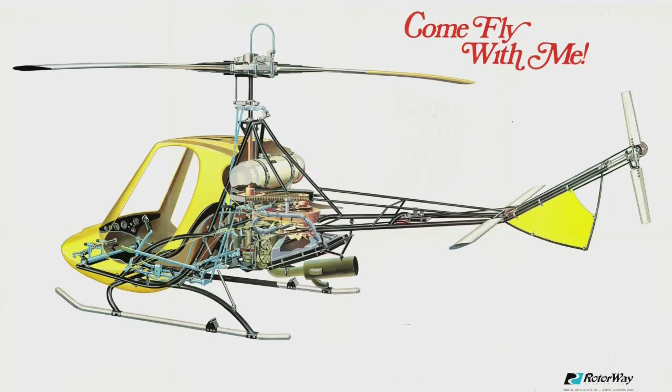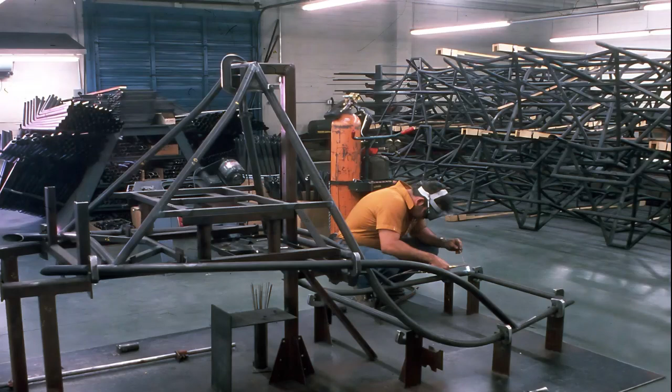After the metal is bent into the proper shape, it is then taken over to the jig area. In this fixture, the airframe is jig fitted and tack welded, so when you receive your airframe, it'll already be properly aligned, and all you'll need to do is finish the welds. In the background, you can see some of the airframes that are already finished and are ready for shipment.

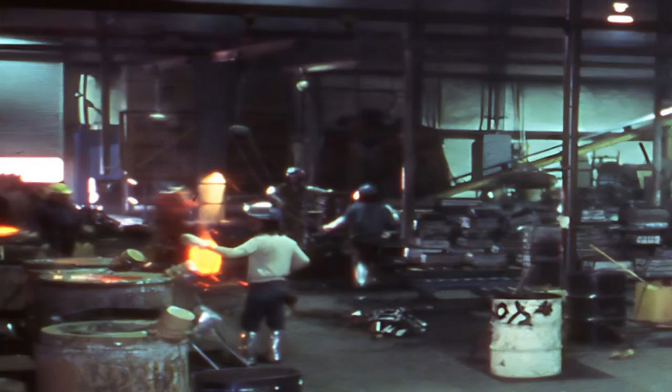This is an interior view of our modern foundry. Several years ago, we decided to go to castings in many areas of the Scorpion to make it more professional and to keep the cost down. But we had a problem finding a foundry that could cast to the precision that we desired. Therefore, we decided to build our own foundry. In the left center, you'll see the fires of the furnaces. In this foundry, we pour non-ferrous materials, primarily aluminum alloys and brass.

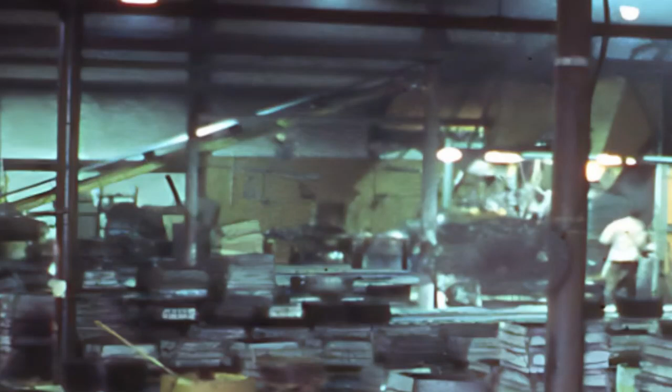In the right foreground, and extending back through the center of the picture, you'll see a grill work in the floor. This houses the underground conveyor belt which handles the sand. In most foundries, the sand is handled from station to station with shovels and wheelbarrows. Here, the only shovels and wheelbarrows you'll see are used for cleanup at the end of the day. The sand starts in the large yellow hopper at the rear of the building.

There it is filtered and cleaned, and then it is transferred to the orange hopper to the right, which is a muller machine. Here the sand is reconstituted with chemicals and moistures for the right consistency, and then it goes up the conveyor belt to the overhead distribution system on your right. From here it is dropped down through automatic hoppers down to the molding stations where the molders make the molds. The molders then put the molds on the conveyor tracks, they move over to the left, and the metal is poured into the molds. After the metal is cooled, the molds are broken open, the parts removed, and the sand goes back down through the grill work to the underground conveyor belt and back to the yellow hopper for reprocessing.

It is this foundry, with all the capability it gives us, that makes the Scorpion so feasible. It's also what made possible the development of our own power plant. The Scorpion is the only general aviation aircraft with its own power plant.

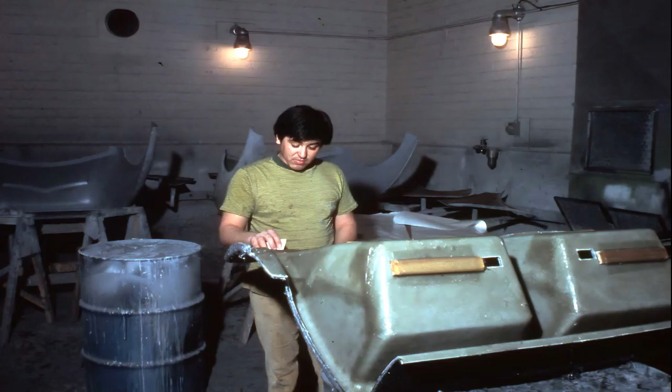This is a view of our fiberglass department. Most fiberglass today is made by a chopper gun. The chopper gun is a much faster and more economical means. However, it is not as strong and is very heavy. Because in an aircraft we're interested in lightweight and strength, we use the hand layup process. In this area, the cabins, seats, instrument panel, oil bath, and all the other fiberglass components in the Scorpion are made, right here in-house.

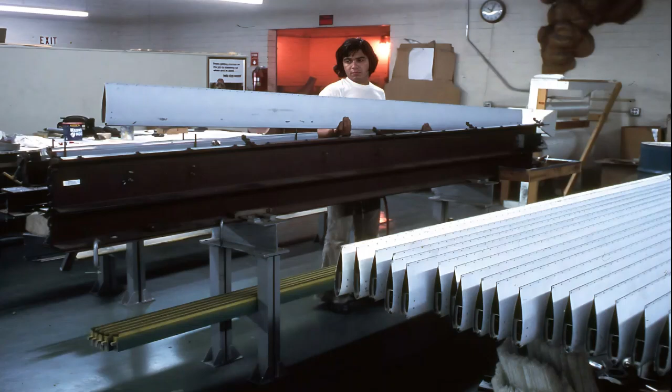This is a view of our blade area. The blade is the heart of any helicopter. The design and construction of a helicopter blade is extremely critical. Not only must they be aerodynamically equal, but they must have the same physical properties such as weight, rigidity, and resonant frequency. The blades for the larger commercial helicopters start at around $6,000 to $9,000 a set, yet in the Scorpion we can make them for a fraction of that price. Our technology in this area is another one of the things that makes the Scorpion so practical for the average person.

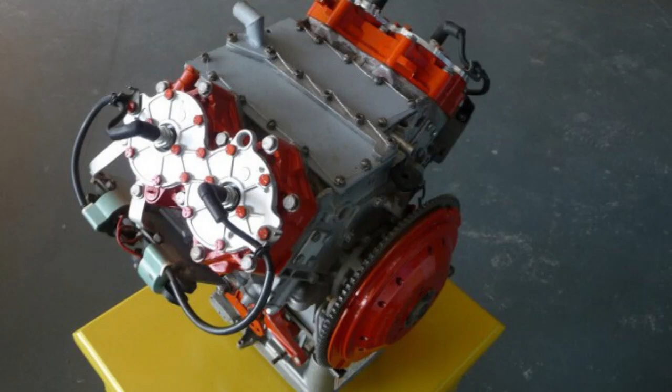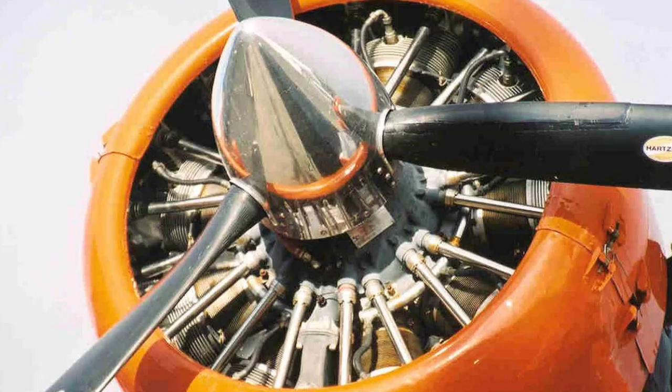As I mentioned earlier, Rotorway makes its own engine. For those of you who have followed the Scorpion for a number of years, you'll recall that we used to use the Evinrude outboard motor. When Rotorway started to develop the Scorpion helicopter, the selection of an engine was given prime consideration. Many engines were looked into. One of the first and most obvious engines to look into would be the standard aircraft engine. But you see, aircraft engines are designed to run horizontally with a prop out front. It doesn't run well vertically. We wanted a vertically running engine so that we wouldn't need a gearbox to transfer the direction from horizontal to vertical, because the gearbox or transmission in a helicopter would be as expensive as the Scorpion itself.

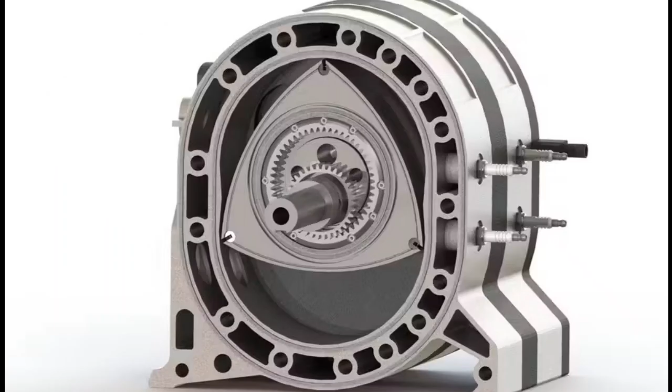Now you may say, I see larger helicopters that have the engines running vertically. Yes, they do, but you see, during the war when the military wanted helicopters, they paid for the development of vertical running engines. This was a very costly process, but the engines they developed were large engines for large helicopters. They're too large for the Scorpion, and all of the other existing aircraft engines in the smaller category are not suitable for running vertically. We investigated many engines: the Continental, Lycoming, Franklin, Chevrolet, Porsche, Volkswagen, many foreign engines such as the Wankel, the NSU, the Mazda, you name it. We've probably tried it. And yet we found that the only engine that made the Scorpion possible was the Evinrude outboard motor.

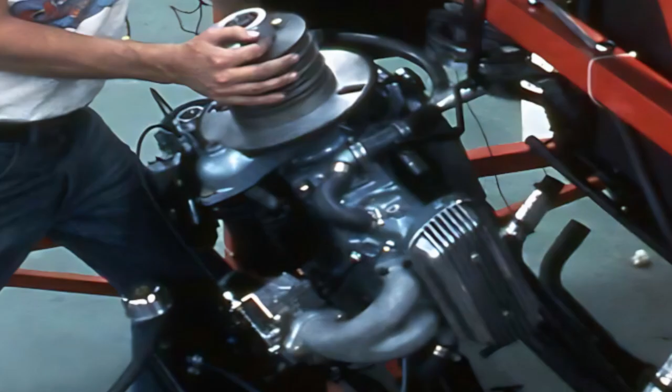The Evinrude was a fine engine, but it was a two-stroke engine which required the mixing of the oil and the gas, and this, as you're aware, causes spark plug fouling. The Evinrude was also a V4 configuration, and a V configuration engine has a rocking couple moment of vibration. Also, two-stroke engines have to run at a very high RPM, and they don't develop very much torque. We wanted a four-stroke engine for the Scorpion, but none was available that was suitable for our application, and thus we decided to develop our own engine. We have designed, developed, and are now producing the RW133, a horizontally opposed, four-cylinder, four-stroke aircraft type engine, all right here at Rotorway for the Scorpion.

This engine is water-cooled. You see, in a helicopter, in a hover, it requires almost maximum horsepower, and at that time there's no ram air. In your car or in an airplane, when you're developing maximum horsepower at maximum speed, you have ram air. To have an air-cooled engine would require a tremendous blower. If we were to use an air-cooled engine, it would require about 36 horsepower of blower to cool it in a hover. But because of the greater coefficient of cooling of water, we can cool this engine with about 6 horsepower. Another advantage of water-cooled engines is that they run quieter because they have a water jacket around the cylinders, and you don't have all those air fins which radiate sound. A water-cooled engine runs cooler than an air-cooled engine, and therefore you don't have as much exhaust emissions.

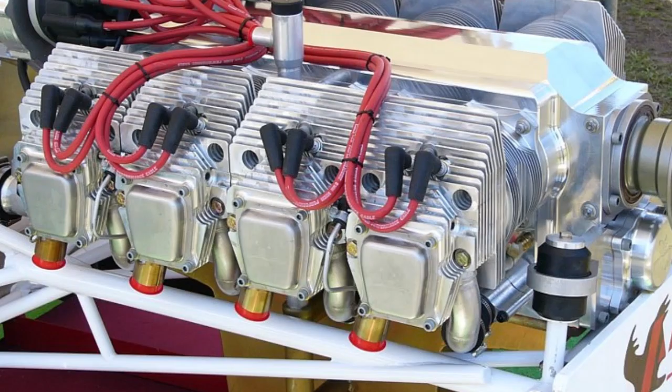Another distinct advantage of water-cooled engines is that we can make the pistons smaller and therefore get by with a single ignition system. Those of you that are aware of aircraft engines realize they have dual ignition, and many people think that this is for reliability, but this is not the case. You see, in an aircraft engine, because it is air-cooled, it has to be much larger, and because it's much larger, the pistons become very large. Since the pistons are large, it requires 2 spark plugs to fire this total wavefront of gas.

Now, this will be evidenced by those of you who fly fixed-wing airplanes. You know that when you pull a mag check, you get a power drop. Why do you get a power drop? Because you're not igniting all the fuel. If you can make the piston smaller in diameter, then 1 spark plug can fire the entire wavefront of gas. So with a single ignition system, we have only half the number of ignition parts to go wrong, or we can say we have twice the reliability.

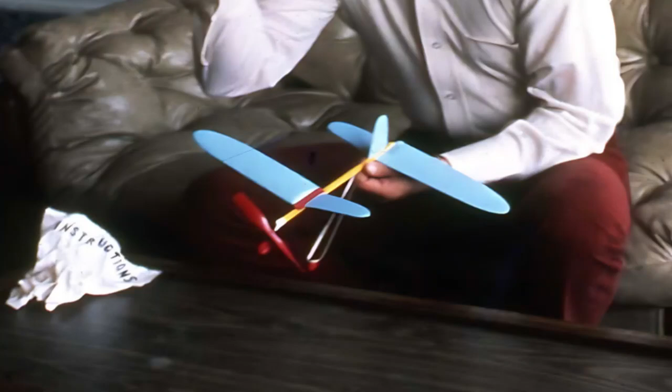Here you'll see one of our smart customers. He's trying to build an airplane, but something's wrong. He's scratching his head, he can't quite figure out what the problem is. It doesn't look quite right. Now to you and I, we see what the problem is. On the corner of the table is a crumpled up piece of paper that says instructions. Now how come those instructions are all wadded up like that? Why isn't this fellow reading those instructions? It'd solve his problems.

But you see, he's a smart customer. He's intelligent, he knows he's intelligent, and he knows that those instructions were meant for people less intelligent than himself. Anyone can build a model airplane, you don't need those simple instructions. But my goodness, look at the problems this gets us into.

Let's do a little exercise. Go get a pencil and paper. First, write down the number of days in a normal year, not a leap year, but a normal year. Now write down the number of weeks in a year. And lastly, write down the number of days in a week.

Now let's see what you wrote down. Unless you're using some sort of a space calendar or something, you probably wrote down 365 days in a year, 52 weeks in a year, and 7 days in a week. These are figures that everyone is familiar with. Now I want you to multiply the 7 days times the 52 weeks.

What did you get? 364 days. The numbers don't add up, do they?

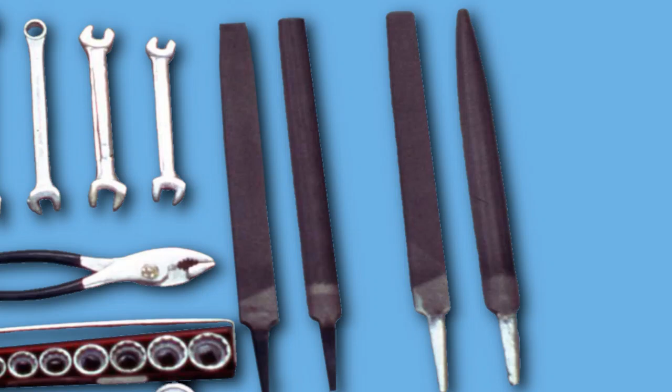There are 2 types of files that I recommend. You should have a set of steel cutting files, such as you see on the left, and a set of aluminum cutting files, such as you see on the right. You'll probably want a flat file, a half-round file, and a rat-tail file. There are a number of aluminum parts in the Scorpion helicopter, and you'll find it much easier to file on aluminum with the aluminum files made for that purpose. Steel cutting files tend to clog up when cutting on aluminum.

Although they're not essential, a socket set will help to speed up assembling nuts and bolts together.

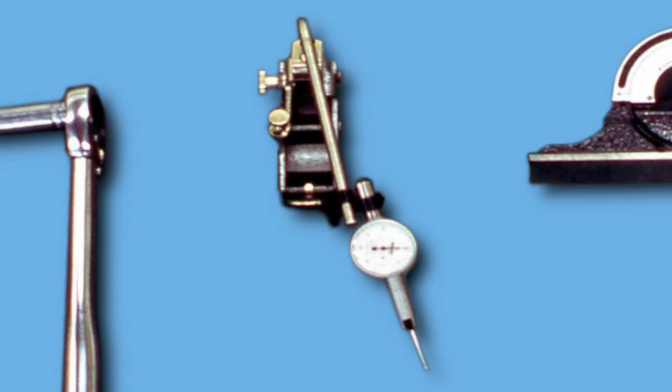There are several precision tools that you'll need for the assembly of your helicopter: a torque wrench for the proper setting of some of the critical nuts and bolts; a dial indicator for checking the concentricity of some of the components, and it's also very useful in setting up the adjustments on the blades later; and a vernier caliper which can measure into thousandths of an inch. You'll not need the accuracy of a micrometer—the accuracy of the vernier caliper will be plenty close enough.

Also, since there are a variety of sizes of measurements to be made in the Scorpion helicopter, you would need to have a complete set of several sizes of micrometers, both inside and outside, as well as depth gauges. Whereas the single vernier caliper will measure from 0 to 6 inches, inside, outside, and also act as a depth gauge.

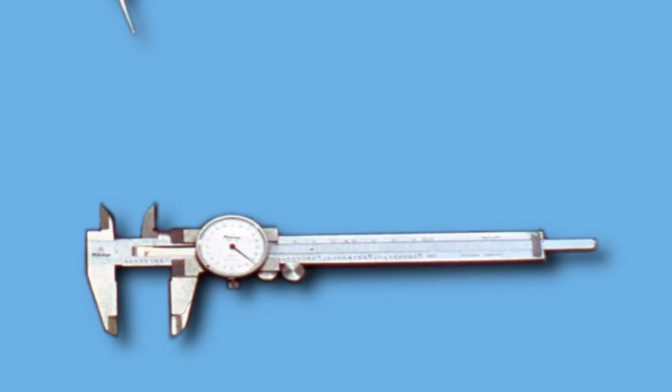We also recommend a protractor level, as you see in the upper left-hand corner. This is a level which comes as part of the tri-square machinist square. It's very handy because the bubble can be rotated and the degrees read right on the scale. This is much easier to use than a standard straight level and then trying to calculate the number of degrees.

Earlier, you saw that Rotorway does all the heavy machining of the components that you'll receive. The power tools that you'll need will be a simple drill press, a bandsaw, a grinder, and a hand drill. The hand drill is helpful for drilling holes on the ship on location. However, the drill press is easier to use when working on sub-assemblies. It also drills more accurately and turns at a slower speed, which makes the drilling easier. The bandsaw is very helpful for cutting out your bracket material, and the grinder is used for grinding the brackets down to size. We recommend for welding on the Scorpion helicopter that you use oxygen acetylene.

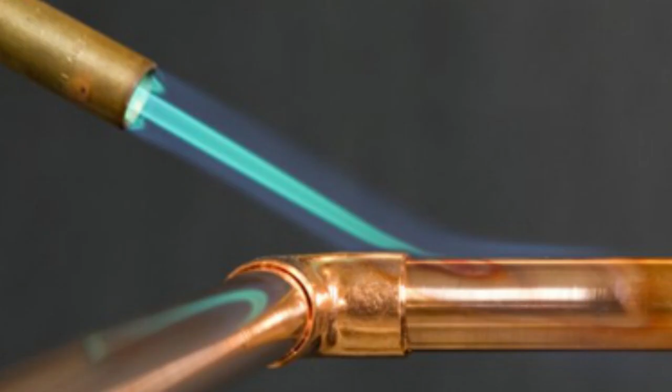Let's discuss several different methods of joining metal together. First, brazing. Now, brazing is not welding, and brazing is not approved by the FAA, so you cannot use it to put your airframe together.

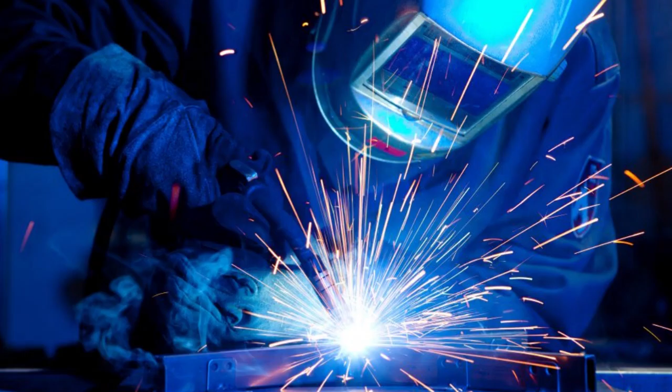A very popular type of welding nowadays is electric arc welding. However, electric arc welding creates a localized heat and causes hardening or brittling of the 4130 steel, and it's also not approved by the FAA for aircraft welding, so you cannot use an electric arc welder.

You can heliarc, or you can use acetylene gas. Heliarc is a very fine method of welding on aircraft chromoly steel, but it does require expensive equipment and technique. Gas welding, on the other hand, is rather inexpensive to purchase and rather simple to use. It's very forgiving, and we recommend it for the novice welder.

If you're afraid of your welding technique, or if you don't know how to weld, we recommend that you go ahead and use the gas process and tack weld all your parts together on your Scorpion. Then when you're all completed, you can have a buddy or hire a professional welder to come in and go over all your welds, and he'll cover them.

When welding on 4130 chromoly steel, you must be very careful not to let the weld cool too rapidly, or this will cause the metal to become hard and very brittle.

Welding should not be done when the ambient temperature is less than 70 degrees. If you do weld when the temperature is lower than that, you should play the torch off of the weld very slowly to allow the joint to cool slowly.

If you weld parts while they're being held in a vise, you should reheat them after they're removed from the vise to allow them to normalize. The vise acts as a heat sink and causes the metal to cool too fast, which again will cause brittle or hardened parts.

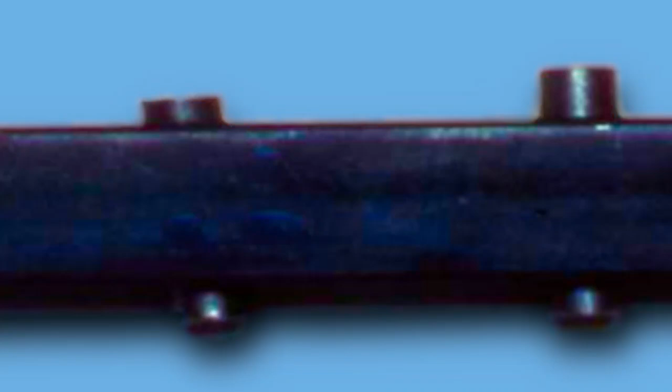In the next example, you see a bushing that has been put through correctly. In the third example, we again see a bushing that has been put through correctly.

However, look at the bushing right where the head of the bolt is. You notice the bushing has not been filed flat or perpendicular. When we tighten this nut and bolt, it's going to put a shear force on the head of the bolt and snap the head right off.

This is not correct. At the extreme right, you'll see a bushing that's been installed through the frame, but it only sticks out one side. This is the technique used when something has to be bolted flat to the frame.

The procedures for making this type of installation will be shown in your step-by-step picture instructions that come with your Scorpion. First, we dimple the flush side of the frame so that when the bushing is put through, we can weld it on both sides.

The bushing must be welded on both sides to strengthen it. On the flat side, we must dimple so that the weld can be recessed into the frame area.

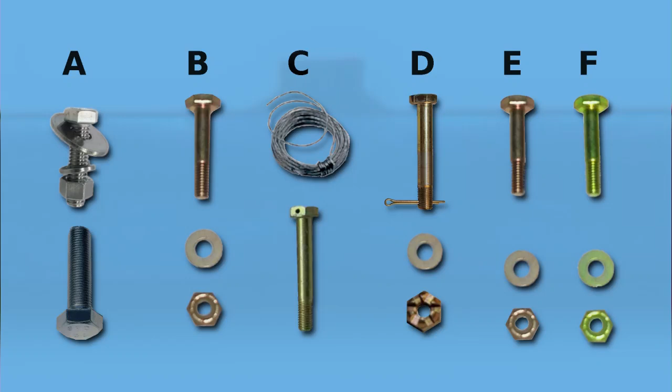Here we see depicted several different types of hardware. At the left, under A, is the standard hardware store variety of hardware. This type of hardware is not used in aircraft. It is usually made of rather soft material, not very strong, and not made very precisely.

The hardware shown in B through F is aircraft hardware. This hardware is made to very careful specifications. It has the right hardness and the right strength, and it is made to closer precision tolerances.

You'll also notice when you examine aircraft hardware that the shank of the bolt is not exactly the same diameter as the threaded area. The threaded area is slightly undersized.

The reason for this is to prevent you from adding more threads to the bolt by running a die on it. If you try to run the die down the bolt to cut more threads, you'll probably ruin your die because of the oversized condition of the shank. Also, because of the forces required, you'll cause crystallization of the bolt, and it will be definitely damaged. So don't run more threads on aircraft bolts.

You see, bolts work much like rubber bands in holding parts together. If you had a package of papers and wanted to tie them together with a rubber band, and you put a rubber band around that was very loose, the papers would just fall apart. In order for the rubber band to hold the papers together, it must be stretched and tight around the papers.

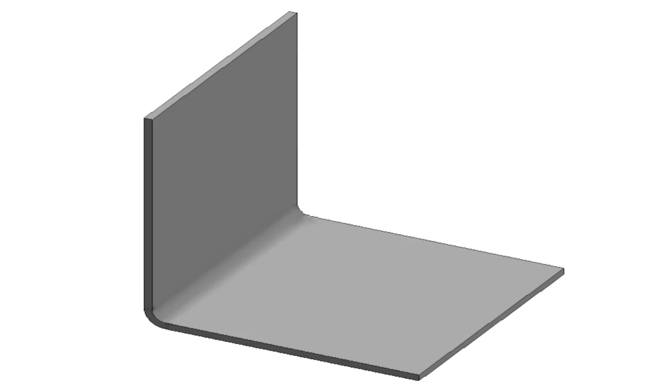If you should inadvertently get a scratch or nick in a part, take a fine file or sandpaper and remove the scratch. This will make the part 10 times stronger. Or perhaps I should say, not doing it will make it 10 times weaker.

There are several different types of machine fits that are used in a Scorpion helicopter. These are described as press fits, wring fits, slip fits, and loose fits. A press fit is a very tight fit, and it needs an arbor press to put it together. All of the press fits in a Scorpion helicopter have been done for you by Rotorway.

A wring fit is a very tight fit, and it could be described as a hand press fit. You do not need an arbor press, but it will be a very close tolerance fit. You will be supplied with some fine sandpaper, and it may be necessary from time to time to take a shaft, for example, and polish it down a little bit with the sandpaper to get the bearing or the part to fit on it properly. Don't use a hammer and force the part on.

We will also be furnishing some anti-seize to be used for assembly of these parts. The anti-seize makes it easier to assemble the part and also keeps the part from freezing onto the shaft, so it'll be easy to remove later. A slip fit is a rather loose fit, and the parts will go together very easily. Then lastly, we have what we call a loose fit. This is almost a sloppy fit.

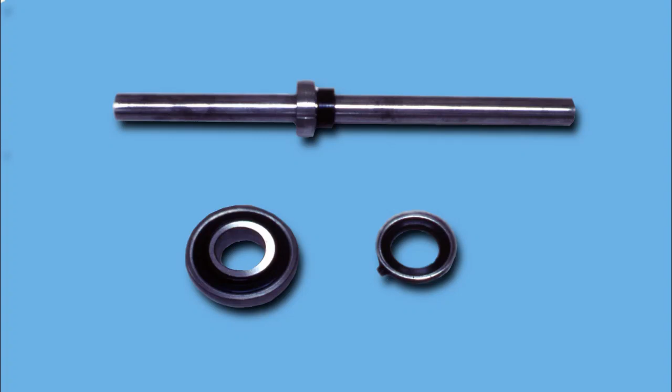Most of the bearings used in a Scorpion helicopter have a locking ring. If you look at the bearing at the lower left, you notice that the hole in the inner race of the bearing appears to be off-center. This is not true. The hole is on center, but the inner race in itself is eccentric. And if you look at the lock ring to the right, you notice that it also has an eccentric surface. When these two units are assembled on the shaft, as you see above, and the locking ring is turned, this eccentric action between the bearing and the locking ring locks the unit to the shaft.

You'll notice two holes in the lock ring. One hole has a set screw. Now the set screw is not what holds the assembly together. The assembly is held together by the locking action of the eccentric surfaces. You'll use the second hole in the lock ring with a spanner wrench or a drift pin and a hammer to drive the ring around to securely lock it. Once the ring is locked, you will then set the set screw to keep the ring from coming loose.

Whenever you're putting these assemblies together on a rotating shaft, always lock the lock ring in the same direction that the shaft rotates. This way, as the shaft rotates, it tends to self-lock the locking ring. In areas where the shaft does not rotate in one direction but oscillates back and forth, such as in a control, it doesn't matter which way you lock the lock ring, but we suggest that you always treat the lock rings as a nut, turning them clockwise, so that in the future, when you go to disassemble the unit, you'll know to turn it counterclockwise.

We're going to show you some of the components of the Scorpion helicopter and how it goes together. You'll see the airframe components as you receive them. You notice that the main section of the airframe has been already jig fitted and tack welded, and alignment is there for you. The tail boom has also been fitted and has been removed for shipping purposes. You will assemble it as follows.

Every aircraft has a leveling or reference point to which the whole aircraft is leveled or referenced. In the Scorpion helicopter, the reference points are the 5 square drive mount tubes in the center of the frame. There are 3 that run fore and aft and 2 that run from side to side. Here you'll see the protractor level set on one of the lateral members and on one of the fore and aft members. All degrees should be measured in reference to these points. Make a simple wooden fixture as you see here, and as is described in the instructions that come with the airframe, and establish the degrees called out in the instructions.

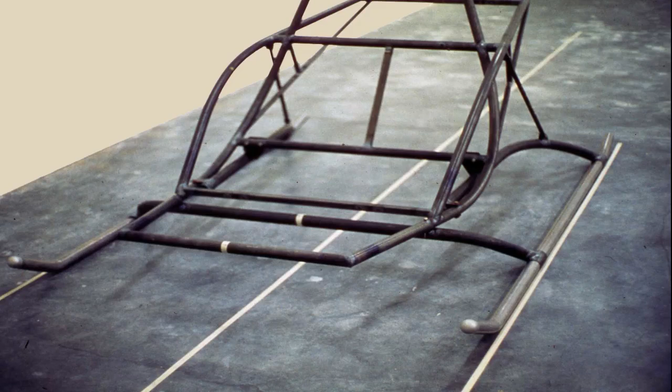After you have established these reference points, you may then install the landing gear. You notice a line on the floor drawn down through the center line of the aircraft. This is to assist you in maintaining the alignment of your airframe as you put it together. After you've installed the landing gear, you may install the tail boom.

In installing the tail boom, make sure that you keep it straight where it joins the main frame at point A. It is important in installing the tail boom that you maintain the dimensions called out in the instructions at points B and C. This is important so that the kick-up area of the tail boom, behind area C, will have the proper parallelity between the 2 members. They theoretically should be parallel so that as the belts stretch and we tighten the belts and the tail rotor is extended out, there will not be any binding loads between the 2 bearings on the tail rotor shaft.

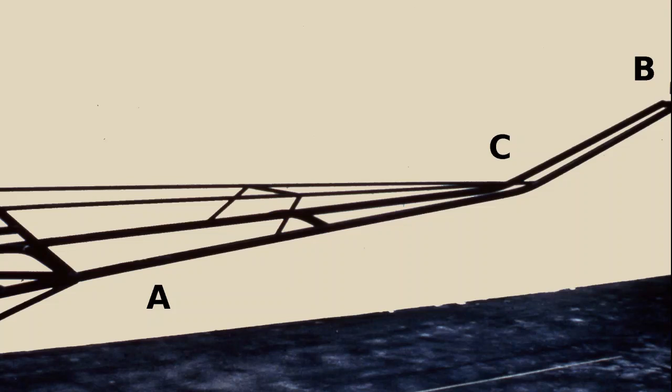Yet they should be triangulated to give it more rigidity and strength. So we have to have a compromise between being absolutely parallel and being a triangle. And maintaining these 2 dimensions will help you maintain the proper degree or proportion of parallelity.

A roller stamps the numbers on the material as it comes out of the mill, and these indicate the grain direction. So make sure that all of your bends with metal go across the grain. Now all the material supplied by Rotorway has been scribed with the bends across the grain. But if you should lose a bracket or mess one up, and you decided to make another bracket out of some of the scrap material you have, make sure that you lay this bracket out the same way it was originally so that the bends will be across the grain.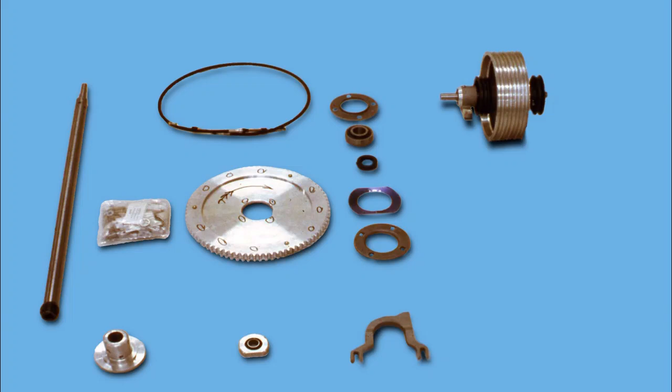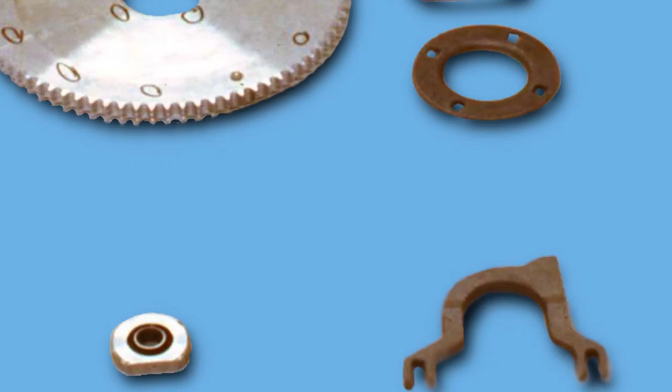In the Scorpion helicopter, we'll see the mechanical components of the helicopter and how they go together. Here we see the lower collective and the secondary drive. The lower collective is on the left and shows the main shaft and the main drive sprocket. Also, you'll notice the little yoke, which is the lower collective mechanism. On the right is the large secondary drive sprocket. The secondary drive is used to reduce the speed of the engine down to the speed of the main rotor.

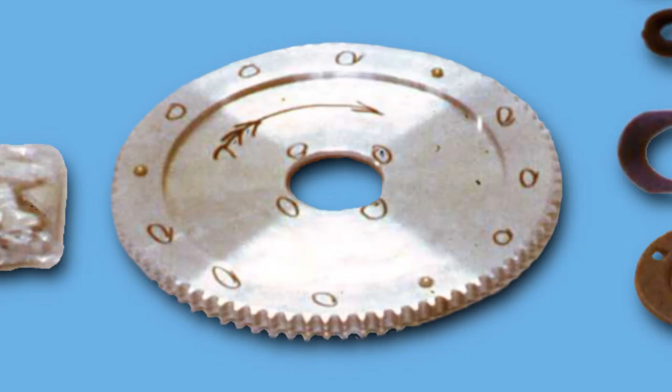You will notice on these rather intricate and precision parts that all the heavy machining has been done for you. There will be a slight amount of work that you'll have to do to complete these units. For example, on the large sprocket, you'll notice on the outside perimeter there are several holes that have been located and center punched. You will drill these holes. In the center are 4 more holes which you will drill. They've already been located for you.

In the lower center part of the picture is a fork, which is the lower collective mechanism. This is a casting which has already been pre-machined for you. However, you will have to do some filing and dressing up to make the rod ends fit properly. After you have this unit assembled, install it in the ship. When installing this shaft, it's very important that you follow the instructions and install it at the right angles as called out in the instructions.

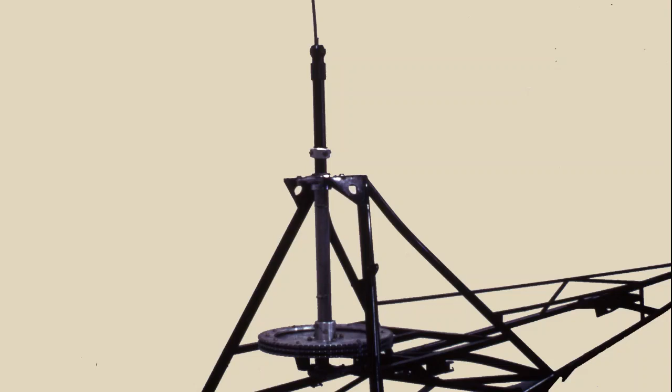For checking the angle of this shaft, you'll reference it with your protractor level to the square drive mount tubes. Remember, the square drive mount tubes are the reference point for the helicopter. If this shaft is not installed properly, it will seriously affect the high-speed performance of the helicopter.

In flight, the control stick would be displaced from its normal position in the fore and aft mode to correct for this. Since we would be flying with the stick displaced from its normal position, it means we would not have as much control power left in that direction, and this would be a hazardous flight condition.

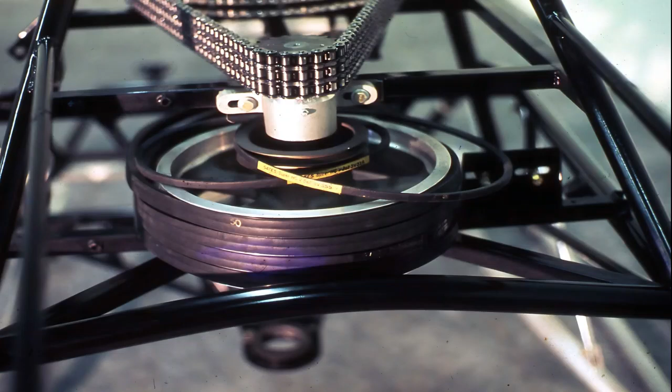We will now install the secondary drive unit. It is important when installing this unit that the small sprocket on the top be at the same height as the large sprocket on the main shaft. We must also take care to see that this shaft is in alignment in both the fore and aft and the lateral mode with the main shaft. This way, we'll not be putting any undue pressure or strain on the chain. If they were not aligned, then either the top or the bottom of the chain would be carrying most of the load, and this would not be a satisfactory condition.

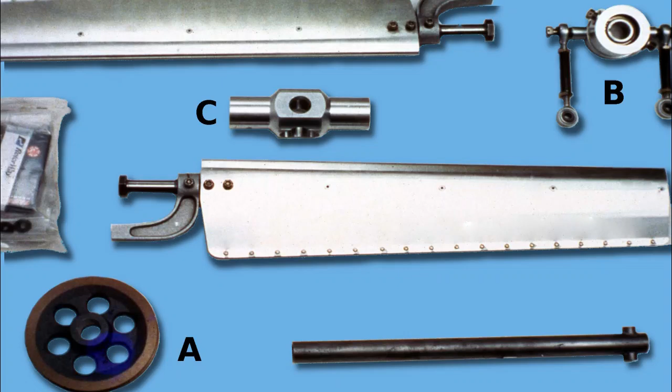The tail rotor components as you will receive them. Here again you will notice that the machining has been done for you. You will notice that the tail rotor blades are completed and the airfoil is established in them. The spars have been installed at the right angle so the tail rotor blades will respond properly. The pivot pins and the pitch horns have been installed and the precision holes drilled locating them on assembly.

The tail rotor pulley A is a casting and has been machined for you. The pulley is made of aluminum. In fact, all of the pulleys used in the tail rotor drive system are of aluminum to keep them lightweight. However, aluminum is not a very long-wearing material. In order to allow this material to wear better, it has been hard anodized. Hard anodizing makes aluminum almost as hard as case-hardened steel. You will be drilling a hole through this pulley to locate it on the shaft, and you must use care while drilling this hole that you do not break your bit, because this is a very hard surface.

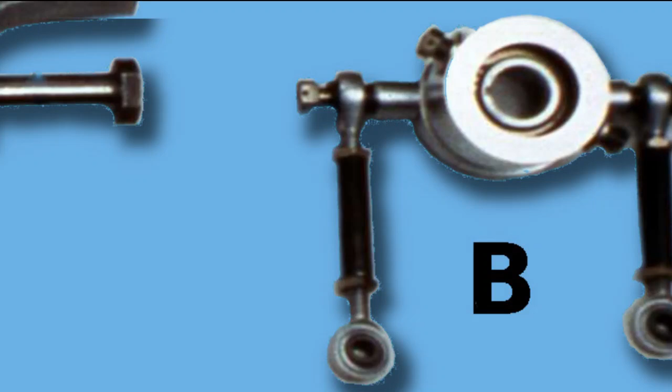Slider assembly B has also been completely machined for you and assembled. This is the mechanism that controls the pitch on the tail rotor. The tail rotor hub, or bearing container assembly as it is called, C, is a very precision assembly and has been completely machined for you. The tail rotor blades are held into this unit with two snap rings, and it's very important that these snap rings be properly installed, or the centrifugal loads imposed by the tail rotors could cause them to come loose.

Take a look at the snap rings. If you look at snap rings very closely, you'll see that one side is rounded and one side is sharp. Snap rings are stamped out of large sheets of steel and then hardened. Because of the stamping process, the die leaves a rounded surface on the top and a sharp edge on the bottom. Anytime you're installing snap rings in a unit or an assembly, make sure that you install the snap rings so that the sharp edge is the edge that will have the thrust against them. For example, in the tail rotor barrel assembly, the sharp edge should be towards the outside of the barrel of the hub.

If they were installed with the rounded surface out, then with the centrifugal load against them, it's possible that the snap ring could extrude out of the snap ring groove.

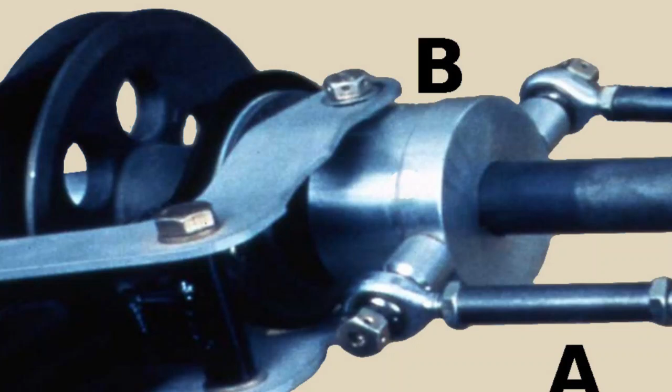We see the tail rotor assembly completed and installed on the ship. The slider mechanism, B, is operated through a mechanism to the foot pedal, and this controls the pitch on the tail rotor blades. The action of slider B is transferred through the pitch links A to the pitch horns C. Only one of the pitch horns is visible in this photo.

The pitch links A are adjustable and are used to adjust the individual pitch of each tail rotor blade. These must be adjusted so that both blades have the same pitch. In this manner, as the slider moves in and out, it will cause the pitch to change equally on both blades.

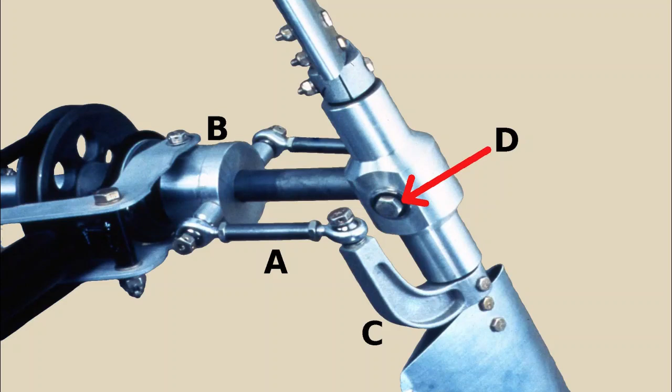We'll take a look at some of the forces that are existent in the tail rotor system. These same forces are existent in the main rotor system, and we mentioned them briefly when we were talking about the main shaft a little earlier.

Although the pivoting action, or the universal, occurs right at the juncture of the shaft with the hub, it'll be easier to illustrate and see this if we drop the universal joint down on the shaft as shown at the X. Let's take a look at the figure on the left. The X represents the universal joint, and you'll notice that the lower portion is called the driver, and the upper portion is called the driven.

There are two types of universal joints that can be used: the constant velocity joint and the Hooke's joint, which was named after Mr. Hooke, who described the physical laws and properties of this type of a joint. A constant velocity joint has a constant velocity at all times.

However, this type of joint will not stand high thrust loads, and since the tail rotor will be developing as much as 65 pounds of thrust, it would take a very large and very heavy joint to use a constant velocity joint in this location. And in the main rotor system, which has to support the whole weight of the helicopter, you can see it would take an extremely large and heavy joint.

Therefore, we're limited to using the Hooke's type joint in these applications. The Hooke's joint is the type of joint you find in the universal in the drive shaft of your car. It will withstand high torque loads as well as high thrust loads, but it does have a disadvantage.

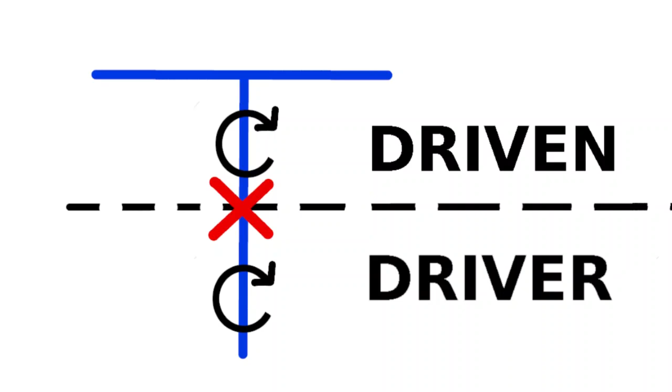Now, if you can imagine this tail rotor spinning around about 2,500 RPM, you can imagine the tremendous centrifugal loads that are generated. This is acting like a large flywheel, and this flywheel is not going to increase and decrease in velocity twice each time this tail rotor goes around. Something has to give. In a normal helicopter where they have a gearbox at the rear and a drive shaft driving the gearbox, you can see that there are tremendous loads imposed in the gearbox and in this drive shaft. This drive shaft is having to flex twice each revolution to absorb this Hooke's joint effect.

This is putting tremendous forces in the tail rotor drive shaft and in the gearbox. The Scorpion does not use a drive shaft and a gearbox. Instead, we use a V-belt drive. These V-belts, being made of a rubber compound, are able to absorb all of this Hooke's joint action, and therefore we have much greater reliability in the Scorpion drive system than is found in the conventional helicopter.

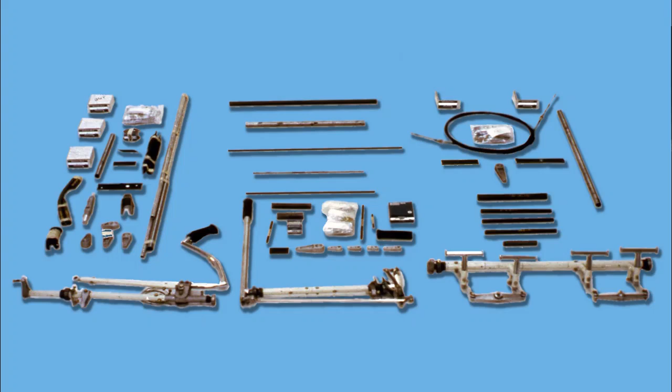We will see the controls of the Scorpion helicopter. In the background are the components as you receive them, and in the foreground the controls as they will appear after you have assembled them. The Scorpion comes with single controls, but is designed with dual controls which are available as an optional accessory.

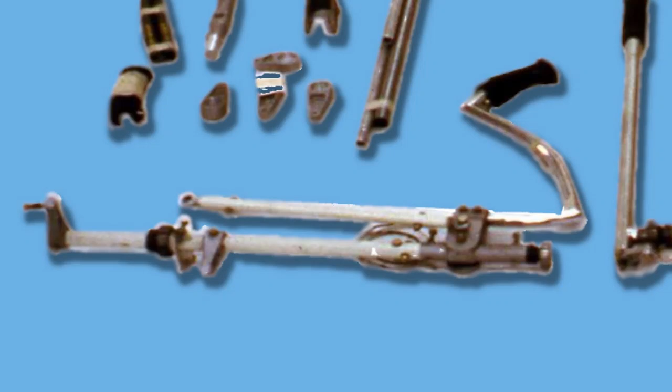There are 3 basic controls in a helicopter. On the left you see the cyclic control. In the center you see the collective and throttle control. On the right you see the foot pedal or tail rotor control. This control is shown in the dual configuration. The cyclic control controls the main rotor system. It controls the direction in which we tip the main rotor system and the amount by which we tip it. The direction in which we tip the rotor system will determine the direction in which the helicopter will fly, and the amount that we tip it will determine how fast it will fly in that direction.

The collective system, collectively or together, controls the pitch on each of the main rotor blades. This will control the amount of lift or thrust that the main rotor system will generate. The rotor systems in all helicopters will always turn at a constant designed RPM. Therefore, to change the lift, we will change the pitch on the blades. Even though the blades are always turning at a constant RPM, whenever we change the pitch or the lift on the blades, we must change our throttle setting.

You see, if you were driving your car down the freeway at an honest 55 miles an hour, and I know you're a nice law-abiding citizen, and you came to a hill and you wanted to maintain that 55 miles an hour, you'd have to depress the gas pedal some. And when you went down the hill on the other side, you'd have to let up on the gas some. Well, the same is true with the helicopter. To keep those rotor blades turning at a constant RPM, if we decide to pull up on the collective and start climbing, we'll have to add some throttle. Conversely, if we wish to descend, we'd have to reduce the throttle somewhat.

At the end of the collective handle, you'll see a motorcycle type throttle grip. This is used to regulate or to maintain your RPM.

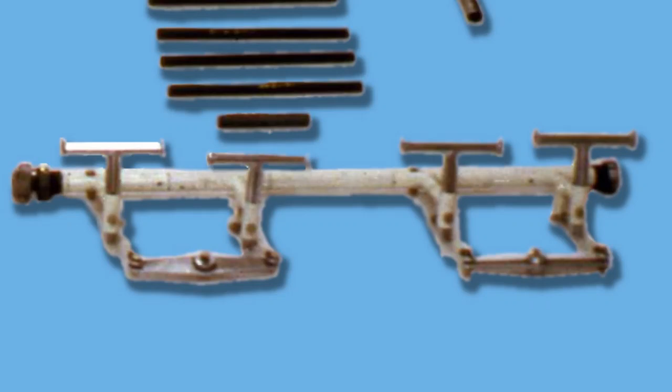On the right, you'll see the foot pedal controls. These control the pitch on the tail rotor blades.

Since the main rotors are being turned by the engine, a lot of torque is being developed, and as the blades turn one direction, the body of the helicopter will want to turn in the other direction. The tail rotor generates a counter torque to hold the heading constant. For those familiar with aircraft, this would be called the yaw control.

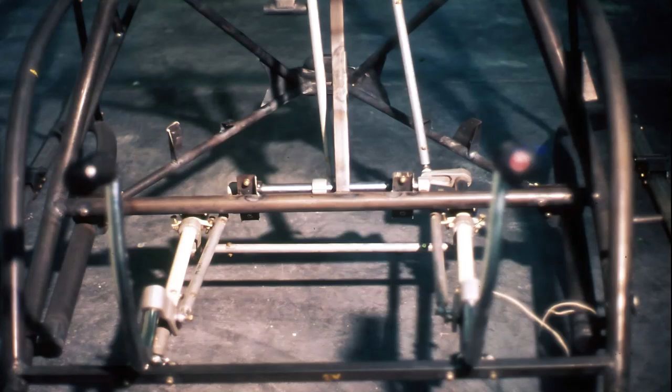Here we see the cyclic control installed. Although the Scorpion comes with single controls, here you will see the dual controls installed so you can see how they look. It's very important when installing the controls that you follow the instructions carefully to get the right number of degrees of movement for the control.

In other words, make sure the operating parameters are correct. This ensures the ship will have the proper sensitivity of control. For example, the instructions call for this control to have a side-to-side motion of 52 degrees through its arc. Let's say you had adjusted the control so it only had 10 degrees of travel. Do you see how touchy and sensitive it would be to control?

On the other hand, if you set it up for more than 52 degrees, you'd not have enough space between your legs to run the control from one extreme to the other, and under some conditions you might not have enough control. So setting the control up to the proper parameters is very important in order to have the proper controllability, or sensitivity, of the ship.

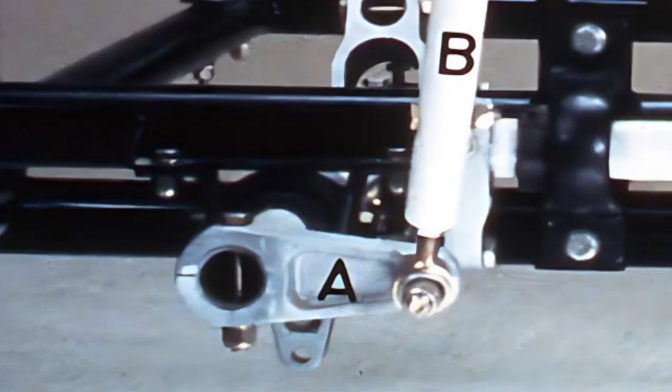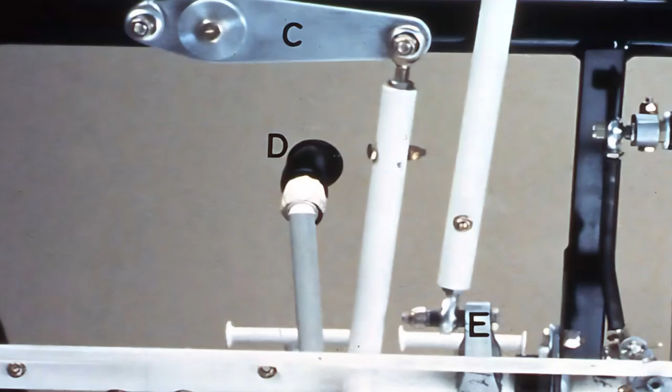Here we see an example of this. Control arm A is mounted 90 degrees to control rod B. When the cyclic handle D is moved from side to side, control arm A will go equally above and below center line, causing maximum travel of control rod B. You'll also notice that walking beam C is mounted 90 degrees to its control rods, and as the cyclic handle D is moved from side to side, walking beam C will move equally above and below center line. The proper mounting of these control arms should be maintained throughout the control system of the Scorpion helicopter.

There are, however, two arms that are not mounted in this manner. The collective control arm E and the foot pedal control arm F are not mounted 90 degrees because of certain design criteria.

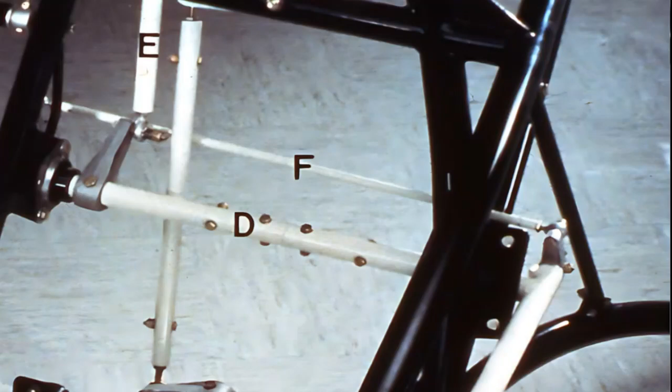The collective mechanism consists of control stick C, which operates control shaft D, which operates the control rod E. The throttle mechanism consists of the throttle handle A, which operates the throttle rod F, which in turn operates the throttles on the carburetors. In the collective throttle mechanism, there are three sets of roller bearing assemblies.

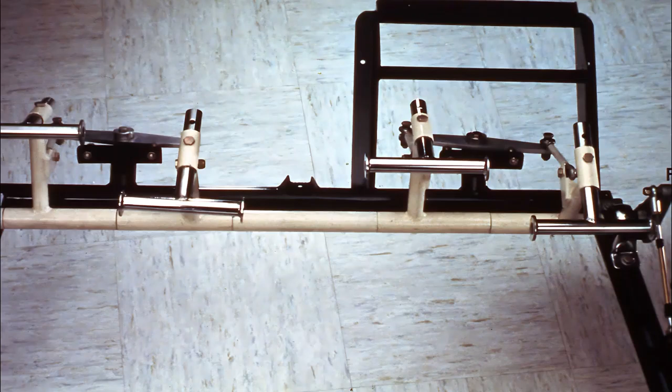We see the tail rotor directional control installed. Although the Scorpion comes with single controls, as shown on the left, the dual controls are also shown installed to the right. Be sure in rigging this control that you have the proper number of degrees of pedal travel as called out in the instructions.

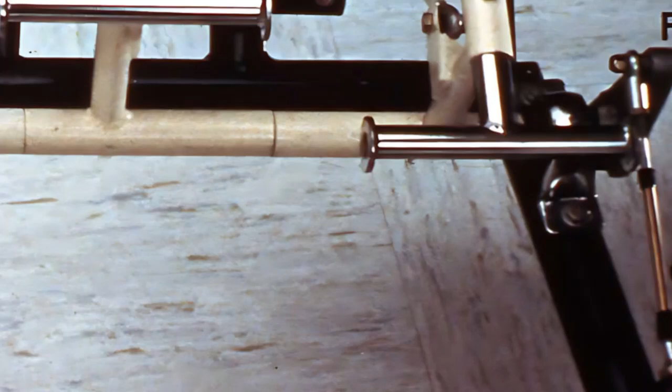In this slide, you will see again control arm F. This is one of the two arms that is not mounted 90 degrees to its control rod, or in this case, its control cable. If you look at the control cable at area G, you'll notice that the end of the cable has a ferrule. This ferrule has a freedom of motion in it to allow for any misalignment of the cable. As the arm goes through its arc of travel, the cable will have to flex up and down. Be sure you do not exceed the free flexing of this ferrule, or you could damage the cable.

If you have properly rigged your cyclic handle and you have all your control arms mounted properly at 90 degrees, when the cyclic handle goes through its proper number of degrees of travel, the swash plate will go through its proper degrees of travel. You'll notice as you're rigging this control up that the swash plate is not designed to have the same number of degrees of travel to the left and to the right.

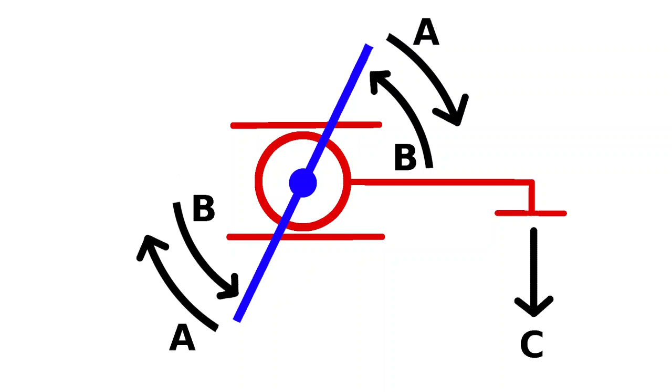To compensate for this translating tendency, we must always take the cyclic stick and move it to the right and fly the helicopter as though we were flying to the right in order to maintain a position over the ground. For this reason, the swash plate must have more travel to the right than it has to the left.

There should be a clearance of about 30 to 50 thousandths from the bearings in the rotor blade assembly to this surface. Less than 30 thousandths might cause some binding. More than 50 thousandths would put undue stress on the pitch pins.

You will notice in the center of the hub that the riser blocks and the main universal are already assembled as you receive them. These units are very precision aligned. Although you'll have to remove these units to do the work that we just talked about on the hub, make sure that you take it apart very carefully and observe the position of all the shims and the parts so you can put it back together in exactly the same manner.

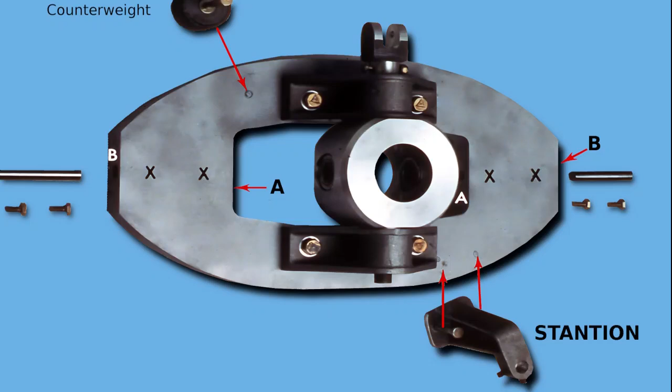The pitch pins in the hub must be exactly in alignment with the hole through the middle of the universal. This will ensure that the blades are mounted exactly on the center of the main shaft. You can imagine if this universal were displaced even a few thousandths, the tremendous eccentric and vibrating action we'd get when the blades started spinning at full RPM.

You'll see the riser blocks and the universal removed. Look carefully at the holes in the hub for the pins at position A and B. You'll notice that the holes at point A are closer to the top surface of the hub plate than they are at pin B. This will cause the blades to be put on the hub at a slight angle.

In Figure 1, we show the rotor blades A and B attached to the rotor shaft. We see that blade A is equal in length to blade B. If we were to plot the center of mass for these blades A and B, we would find that the center of mass, CM, would fall right on the dot.

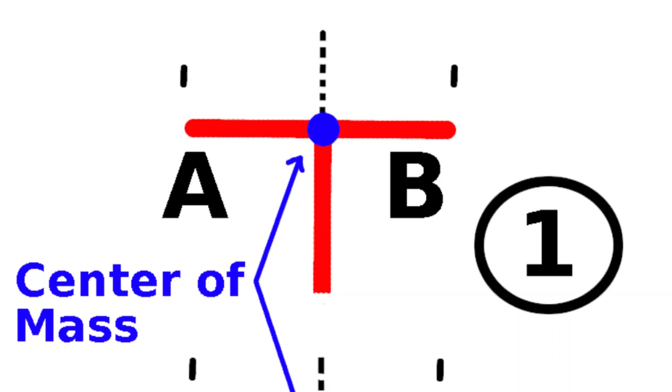This shows the blade system in a hover condition. Now, if we wish to fly to the right, we would flap the blades to the right as we see in Figure 2. We could draw some vectors of this blade system, and we would see that we still have lift, but we have also a force pulling the ship to the right. You will also notice that blades A and B are still equal in length, or equidistant from the center point of rotation. Now, this would be fine if helicopter blades worked this way, but they don't.

You see, helicopter blades have to be very lightweight, and they're quite limber. If we were to have a helicopter sitting on the ground in a static condition, and I got on one end of one blade, and you got on the other end of the other blade, and we tried to pick the helicopter up, we would not lift the helicopter off the ground. We would merely succeed in collapsing the blades like an umbrella in a windstorm.

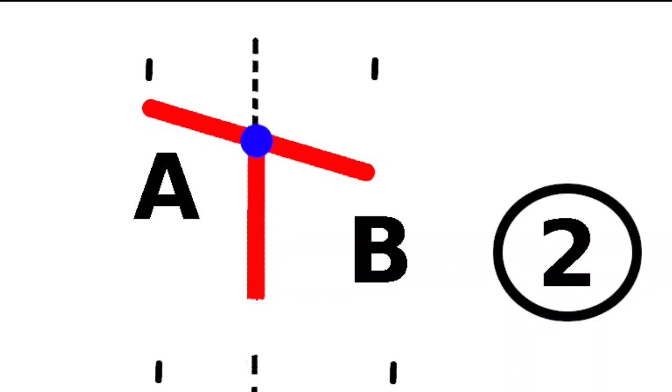This is the reason the helicopter rotor systems must always turn at a constant RPM. They must turn fast enough so that they'll generate enough centrifugal force to maintain the proper amount of rigidity. Yet we don't want to turn them too fast, or we generate too much centrifugal force and we would exceed the design criteria of the hub.

Another factor to be considered in the design of the speed of a rotor system is that since the blades are rather narrow in chord, they must turn very fast through the air in order for this small airfoil to develop sufficient lift. Yet if we turn them too fast, the tips of the rotor blades could exceed the speed of sound and we'd have a sonic boom, and that would not be a pleasant experience.

Therefore, all rotor systems must be designed with a tip speed that will develop the proper amount of centrifugal forces to make the blades rigid, go fast enough to develop lift, yet at the same time not develop too much centrifugal force, and not approach the speed of sound. All helicopters operate with their blades with a tip speed of approximately 400 miles an hour. This is true both of the main rotor and the tail rotor.

This is why in a small helicopter, such as the Scorpion with the short blades, we turn at 500 RPM to generate these forces, and a larger helicopter with longer blades would turn at a lower RPM so that the same forces would be generated.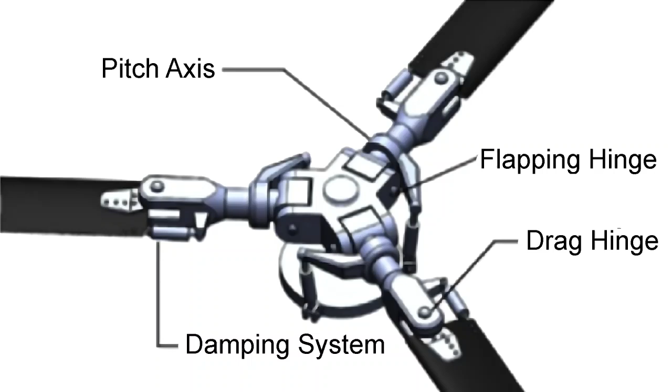If the helicopter is bounced on the ground during takeoff or landing, it could cause the blades to go out of phase, and then we would really have a vibration. And in fact, the helicopter would probably self-destruct within about 3 to 3.5 seconds. We did not feel that this would be the proper system to be used in a helicopter designed to be built and operated by the novice. Therefore, we used the third system, the semi-rigid underslung.

In Figure 5, you see the semi-rigid underslung system. You'll notice that the hub is mounted on a pivot point on the top of the rotor shaft, but the blades are connected to the hub down below this pivot point. You notice as the blades are coned that the center of mass, this imaginary center of mass, falls on the pivot point on the shaft. You'll notice that blade A and blade B in the hover condition are equidistant from the point of rotation.

As we flap the blades to the right in Figure 6, you'll notice that as the hub pivots on its pivot point, blade A lengthens and moves out, and blade B shortens by pulling in, so that we still have blade A and blade B equidistant from the point of rotation. It can be seen that in the design of the rotor hub system, the amount of this underslinging must be designed so it will be right on the center of mass with the blades coned as they will be in flight.

Since the coning angle of the blades will be determined by the speed at which the blades are turning and the centrifugal forces generated, it's very important that we maintain the rotor RPM at the proper RPM so that the undersling will always be correct. Too low an RPM would generate less centrifugal forces and we'd have more coning, and our underslinging would not be correct for that amount of coning angle. Conversely, too much RPM would generate too much centrifugal force and our underslinging would be too great for the coning angle. Also, too much RPM would generate too much centrifugal forces on the hub.

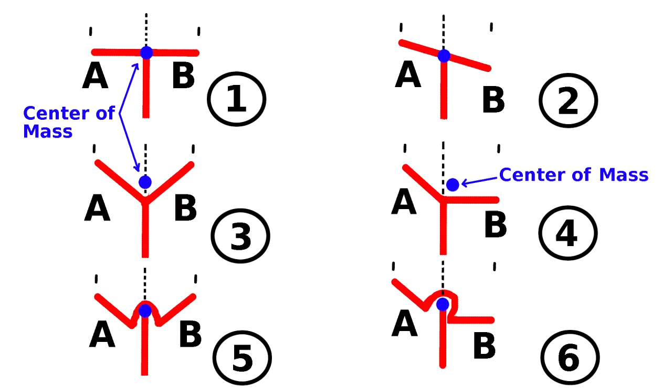In any aircraft, the aircraft will be rated for a certain amount of total weight it can carry. But you just can't put that weight any place in the aircraft. It must be properly distributed. You can't put it all in the front seat or all in the rear seat or all in the baggage compartment. This is called proper weight and balance.

In a fixed-wing aircraft, because we have a large wing out front and an elevator towards the rear, we have a fairly stable condition, and the weight and balance can be distributed within plus or minus 12 to 14 inches. But in a helicopter, since it hangs from a single pivot point, as we see in Figure A, a slight change in weight and balance can cause the ship to hang nose down or tail down. We can see then that in a helicopter, the distribution of the weight is very critical.

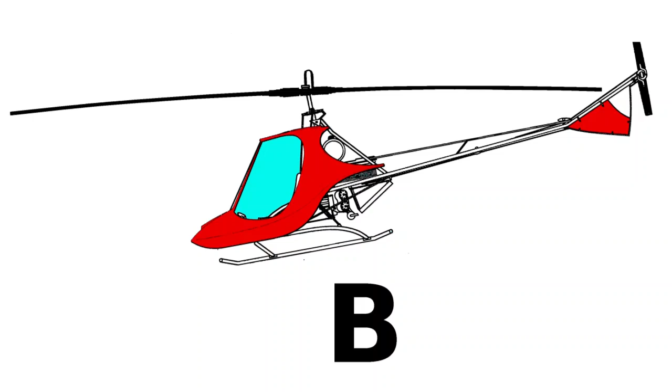In Figure A, we see the weight properly distributed and the helicopter is hanging level. In Figure B, we see that the weight is distributed too much towards the front of the aircraft, and we see the helicopter hanging nose down. Look at the juncture of the main shaft with the rotor blades. Look at the acute angle here.

If you will review slide 48 and the discussion at that time, you'll see that this causes quite a bit of Hooke's joint. This Hooke's joint will have to be absorbed by the main shaft and the secondary drive, or our transmission system. This is why we use a belt drive in the Scorpion helicopter. Most helicopters use a gearbox, but can you see all of the forces that are applied upon the gears of a transmission? That's why the transmissions don't last too long in a helicopter. But the V-belt drive of the Scorpion is able to absorb all of this Hooke's joint effect.

However, we do want to try to minimize this Hooke's joint as much as possible because it does cause forces in our hub system, the main shaft, the large sprocket, and the drive chain. The more we can reduce these forces, the longer all the components will last. Figure C shows these same conditions in a lateral mode. Here we're looking at the ship head-on, and we can see that the weight and balance is distributed properly and the ship is hanging level.

Figure D shows a helicopter improperly weight and balanced in the lateral mode. Now we can see the weight is to one side and the helicopter is hanging off to one side, again causing a Hooke's joint in the main rotor system.

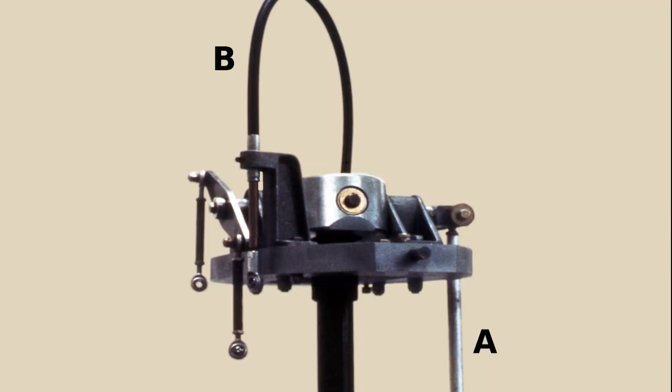We see the hub unit finished and installed on the helicopter. Here we can see the cyclic rod A connected from the swash plate to the rotor hub. This rod, connected to the swash plate, which in turn is connected to the cyclic handle, controls the attitude of the main rotor system. We also see the collective control cable, B, which controls collectively the pitch on both blades.

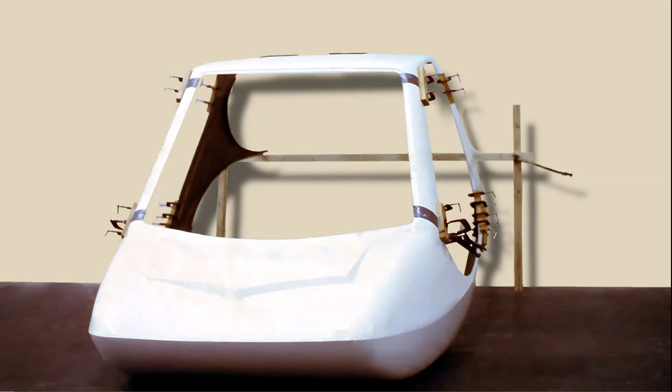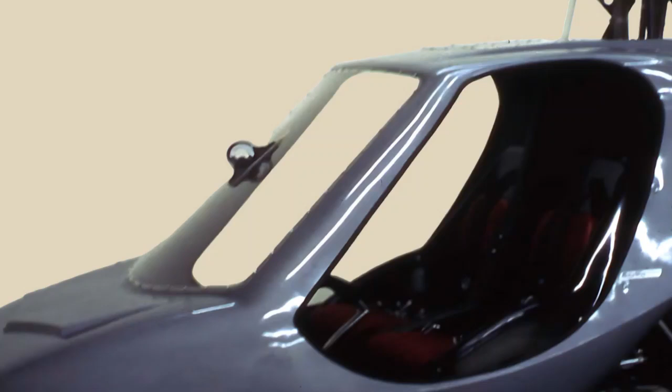You'll see the simple procedure for putting the body together. Then with a little body putty at the joints, a little sanding, a little paint job, you'll have the body all completed. When you install the body on the ship, make sure you use a protractor level and get the windscreen at the right angle to the main shaft as called out in the instructions. It's important in installing the body that we maintain this proper windscreen angle so that we have the proper aerodynamics of the body.

We see a condition depicted that is common in most helicopters. We're looking down on the top and we see the blades rotating in a clockwise direction. Now the blade tips are traveling at 400 miles an hour. Let's assume that the helicopter is traveling forward at 100 miles an hour. Now at this time we can see the blade that is moving forward is traveling 400 plus 100 miles an hour, or 500 miles an hour. And the other blade, which is traveling to the rear, is traveling 400 miles an hour minus 100 miles an hour, or 300 miles an hour.

Now we have a 200 mile an hour differential of lift between the two blades. We had the same condition in the tail rotor, remember? In the tail rotor, we allowed the blades to just freely flap and find their own center to correct for this differential of lift. But we can't do this with the main blades, because if the blades flapped, then the helicopter would start flying in that direction.

So we must have a mechanism in the hub that as the blades come around, the blade that is going forward will decrease in pitch, lowering its lift, and the blade that is going to the rear must increase in pitch to increase its lift. In this manner, we maintain equality of lift on both blades at various airspeeds.

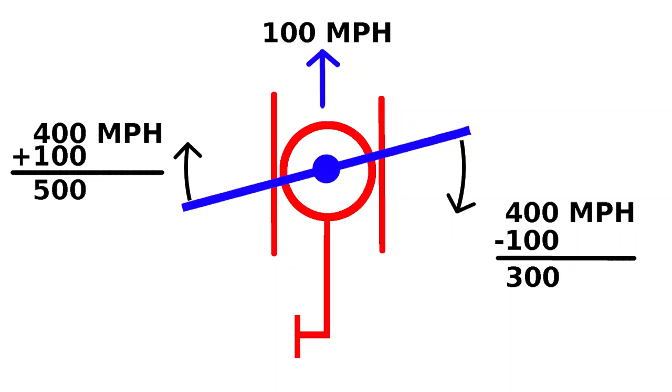This is called profile drag, and you can see that it is much easier to recover from profile drag than it is from retreating blade stall.

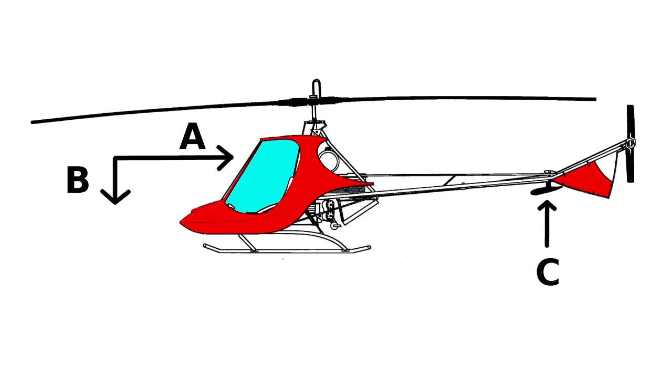You see a close-up of this horizontal stabilizer trim fin, and it's very important that you use your protractor level and get it in at the right angle so that it will properly compensate for the profile drag on the windscreen.

We see a triangular framework on the rear of the helicopter, and this is called the tail rotor skid. It is to protect the tail rotor and keep it from hitting the ground if we should approach for a landing in a real tail-down condition.

It is also the mounting point for the vertical trim fin, which gives us stability in forward flight.

This shows the main rotor system as you receive it. This is a very critical unit, and all of the critical assembly is done as you receive it. There will be a slight amount of work you will have to do to complete this assembly.

Now that you know everything there is to be known about helicopters, and you're a helicopter expert—or well, almost, at least you're well on your way towards it—let's take a quick review in the next 15 slides and see the Scorpion put together.

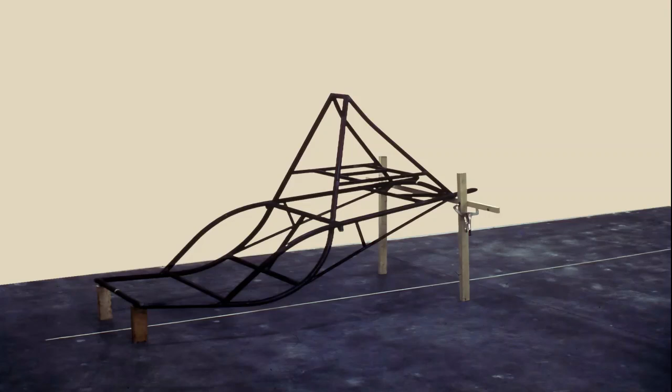We see the airframe blocked up and leveled. We see the landing gear installed. The tail boom installed. We install the lower collective, the main shaft, and get it properly angled. We install the secondary and align it to the main shaft. We install the tail rotor and the tail rotor drive system. Install the controls. Install the swash plate. Put on the hub, connect it. Install the engine. The radiator and the fuel system. Put on the cabin and maintain the windscreen angle. Install the blades.

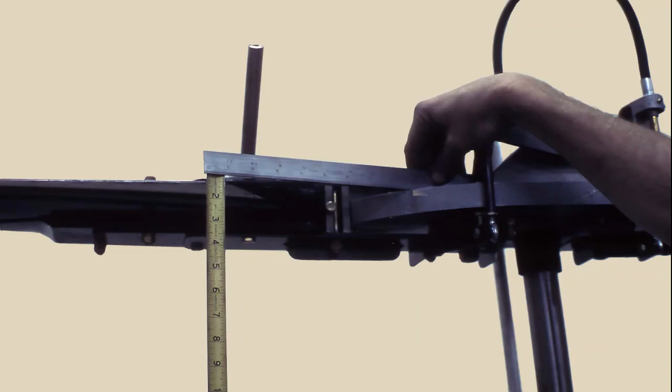Now we'll make a few simple rigging adjustments on the ship.

We're ready to fly. Can you think of anything more exciting and more exhilarating? This is the way to fly. The helicopter gives you the freedom of the eagle. This is the closest thing to pure personal flight. You become a part of the machine, the machine becomes a part of you, and you feel this freedom of flight in 360 different directions, any point of the compass as well as up and down. Don't you want to start your Scorpion today?